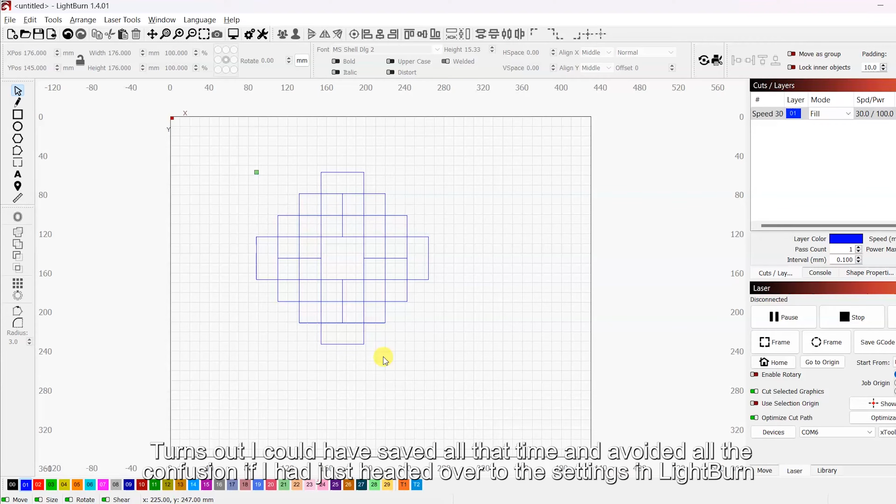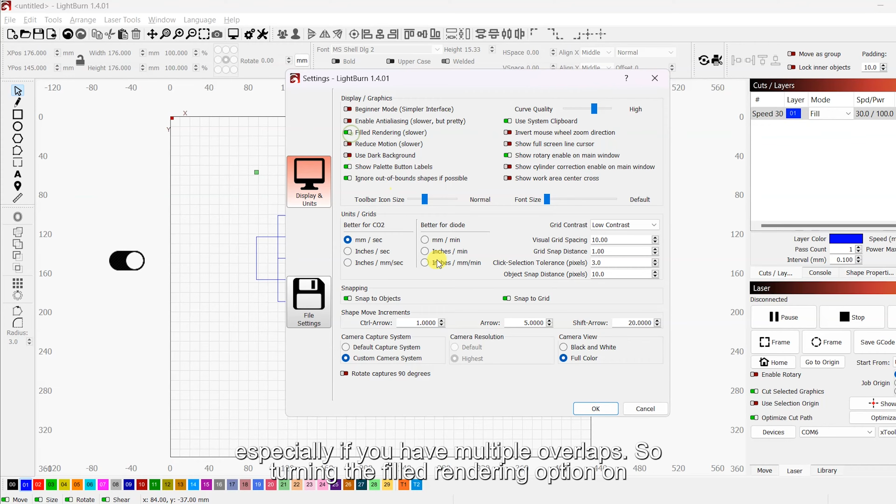This is something I wish I knew from the day I started with LightBurn. I wasted so much time trying to figure out how my overlapping drawings would end up. Turns out I could have saved all that time and avoided all the confusion if I had just headed over to the settings in LightBurn and turned on the filled rendering option. This turns the shading on for all your filled shapes, and you will be able to see what will happen to your overlapping fill shapes in real time as you work. Without this option, all you would have is the outline of your shapes, and it would be difficult to figure out what will happen to the overlaps, especially with multiple overlaps. So turning the filled rendering option on can help you avoid mess-ups and save you a lot of time when setting up your designs.

When you engrave, the laser moves back and forth across the image and fires at points where it needs to be engraved. Sometimes your design might have a lot of empty areas in the middle, and the laser would be moving over these areas without doing anything. This is called travel moves. The more travel moves you have, the more time your projects would take. There are quite a few ways to reduce travel moves in LightBurn.

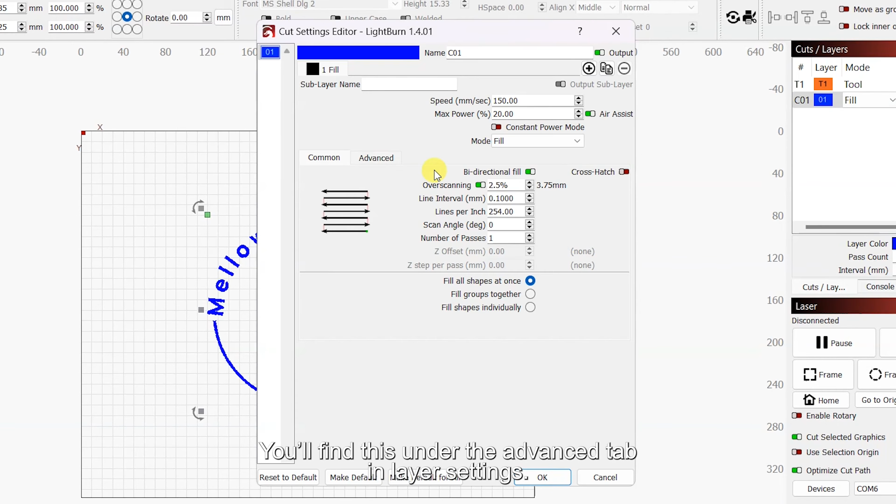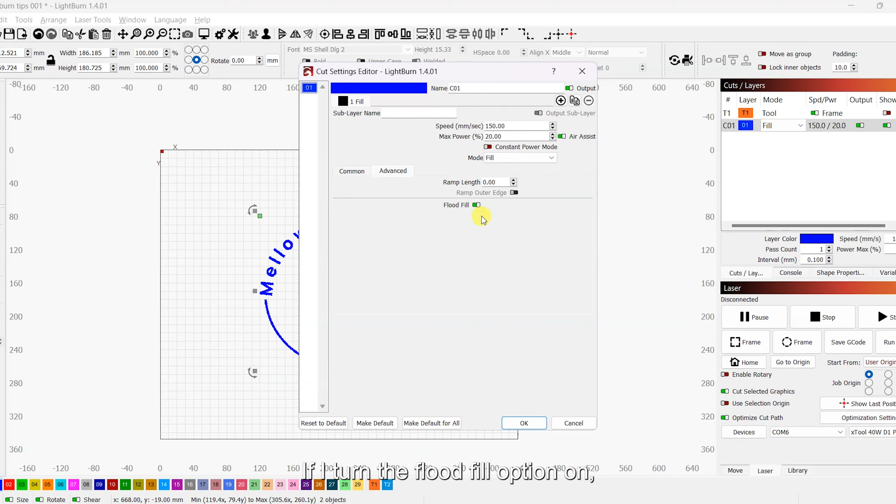The first one is to use the flood fill mode. You'll find this under the Advanced tab in Layer Settings. When you turn this on, each of the objects is filled individually. If you have a design like this with lots of blank areas in between, the laser would avoid moving over the blank area and the time taken would be less. For example, if we engrave this design without any optimization, the laser moves over all these areas without doing anything, and it would take nearly 26 minutes to complete. If I turn the flood fill option on, the laser avoids moving over empty areas and it takes around 14 minutes.

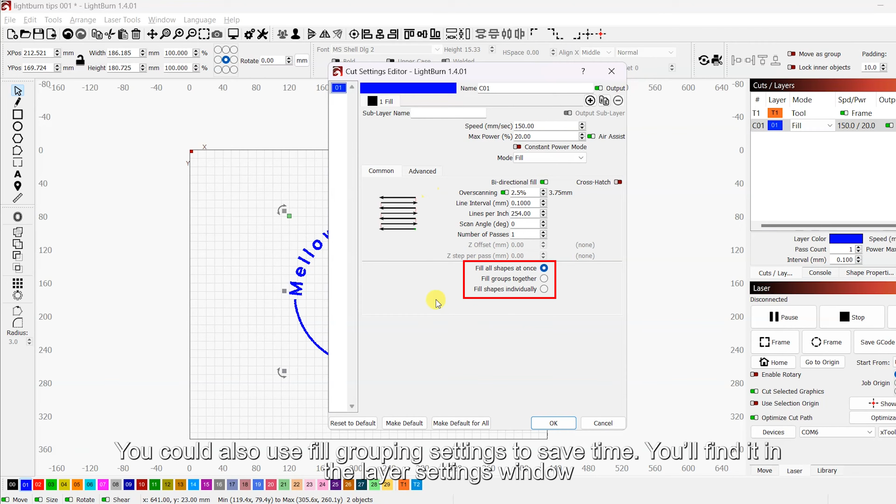Now let's get back. You could also use fill grouping settings to save time. You'll find it in the layer settings window at the bottom. There are 3 options here. The first one is your default setting and this takes the longest. You also have 2 more options. One is fill groups together, where you can group elements to engrave faster based on the design. Like in this example, if I group this and this together, the engraving becomes marginally faster. Then you have fill shapes individually, which works like flood fill and engraves objects one at a time.

The next option to improve speed is to use the offset fill mode. What it does is create a spiraling toolpath that keeps growing till it covers the entire shape. This can sometimes be faster, but you might also end up getting unfilled areas with certain materials, so use this with caution. Those are the 3 things you could do to reduce cycle time. Play around with these and select the one that best fits your design.

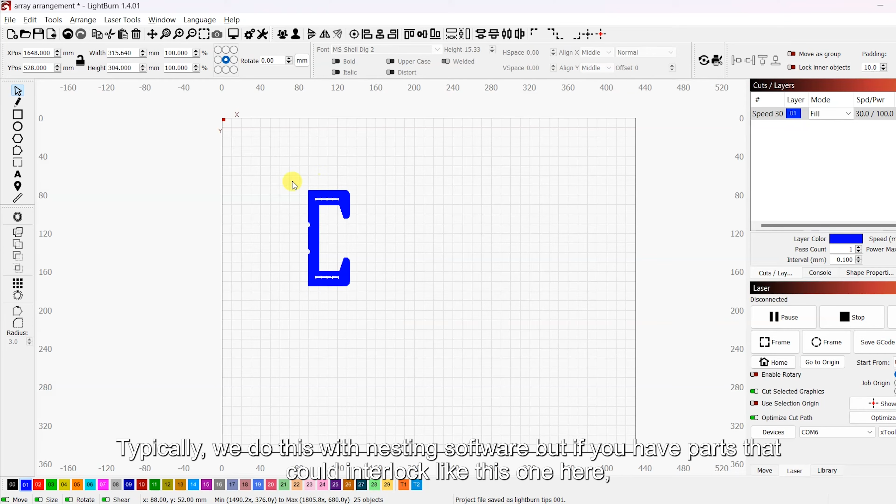This technique is for those processing parts in batches, specifically those who cut small parts out of large sheets. Typically we do this with nesting software, but if you have parts that could interlock like this one here, you could use the array function to arrange them to save space. If I want to make 25 of these, the usual arrangement would consume around 500 by 225 mm of my material. You could reduce this.

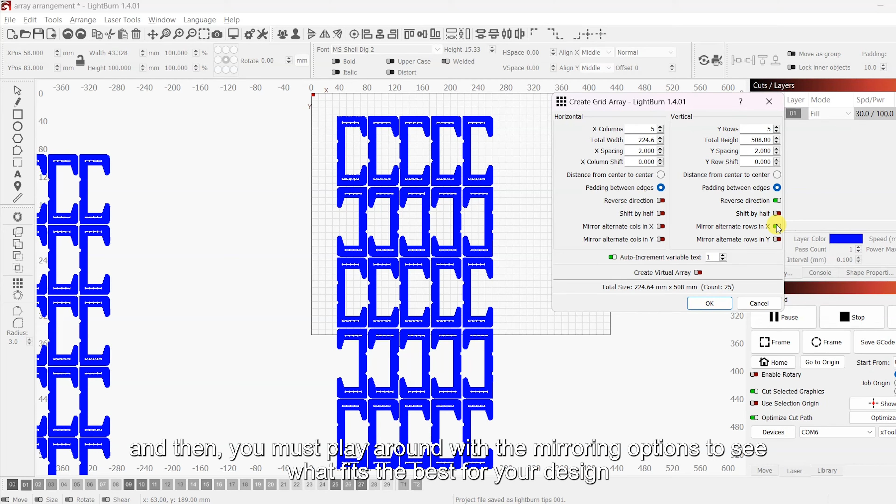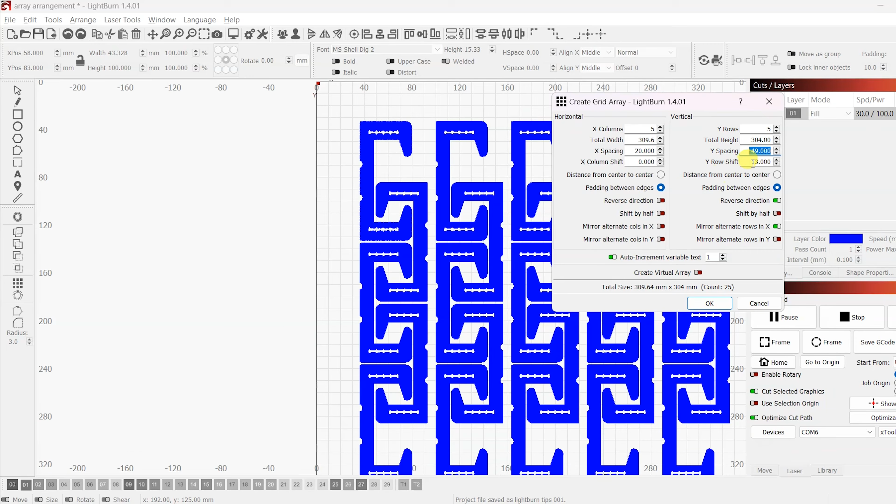Just go to create an array like you usually do, then select the number of rows and columns you need, and then play around with the mirroring options to see what fits best for your design. In this case, I'll mirror the alternate rows in X, and then if I change the Y row shift value, you can see the alternate rows moving, and when I get the protruding part in the middle, I'll stop and reduce the Y spacing till I get part of one shape within another without overlap. Then we'll increase the X spacing to remove the overlaps and we are good to go. This one now has a size of around 300 by 315, which is around 16% of area saved. This goes up as you increase the number of copies.